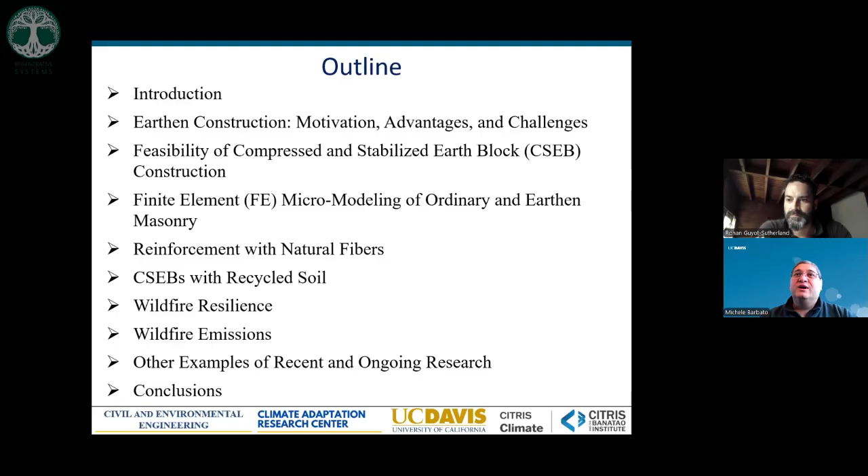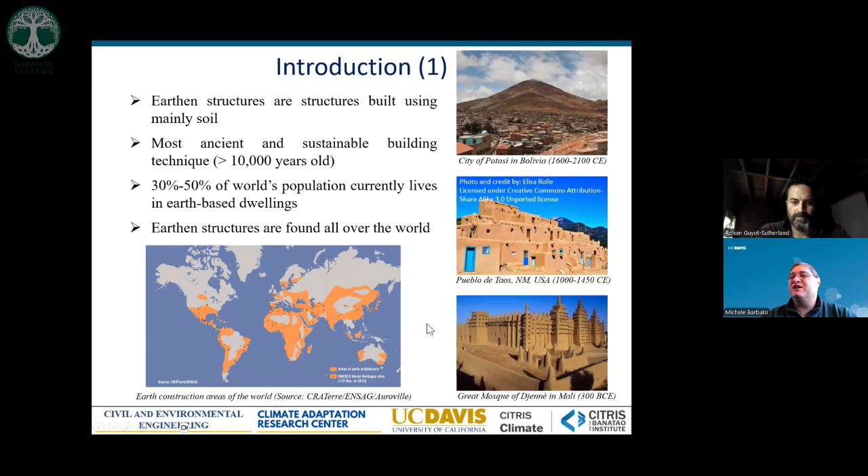Earthen construction exists in very different forms. Historically we have cob, rammed earth, and adobe—different ways of building with basically the same material. Cob is fundamentally building walls with layers of a slurry made mostly of soil; it's very common in medieval England and Great Britain. Rammed earth is a construction technique where soil is rammed from both sides into a wall to provide more mechanical strength—an example is the Great Wall of China. Adobe is probably the most common, at least here in the US, where blocks are made using soil, pressed by hands or feet, mixed with straw or other material for additional resistance, typically dried under the sun, and used like normal bricks.

A more modern twist on this ancient technology is the usage of modern earth blocks in three versions: compressed earth blocks, stabilized blocks, and compressed and stabilized earth blocks. Compressed earth blocks are soil mechanically compressed into the form of a block, which increases the mechanical strength of the brick. Stabilized blocks are when chemical stabilizers are added to the mix to provide additional resilience and durability to weathering effects, particularly water. Compressed and stabilized blocks combine both technologies to create a stronger brick through mechanical compression and a more durable brick through the addition of chemical stabilizers, typically cement or lime.

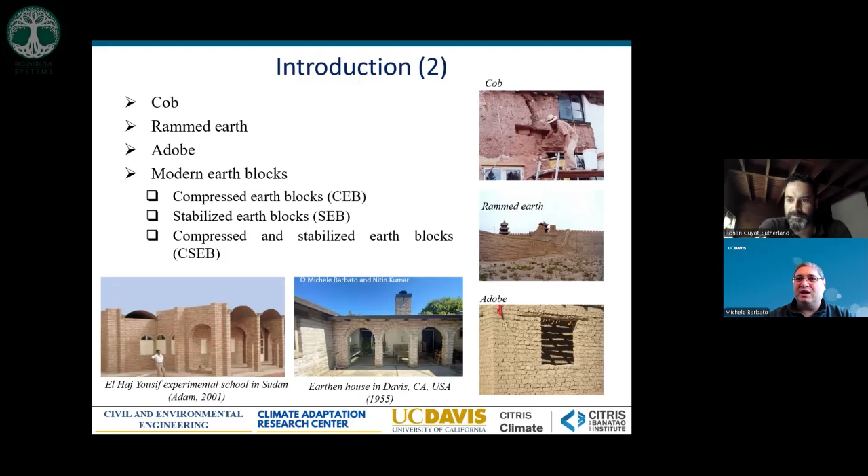Our research is focused on these compressed and stabilized earth blocks, which in our opinion are where modern engineering can be best used to improve not only the material but also how it is used. So why are we looking at this ancient technology and trying to make it modern? There are two different types of needs.

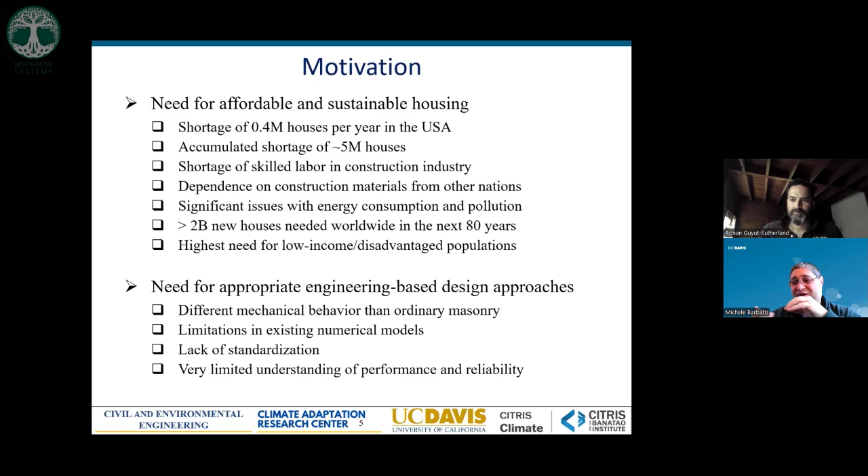On one side is the need for affordable and sustainable housing. In the US alone, we have a shortage of 0.4, now closer to 0.5 million houses per year, and an accumulated shortage—this data is a little old, but it's definitely more than 5 million houses now. Also, we have a problem with skilled labor.

People building in the construction industry—there are not enough people to cover all the jobs that are available. And we have become more dependent on construction material coming from other nations, which has a lot of additional problems we saw during the COVID pandemic: problems with supply chains, timber material went up more than 100% in cost. This was a huge issue. We are now looking at political situations where tariffs could again increase prices of material.

All of that has a chain effect on the industry's capability to provide homes to people who are in need. There are also a lot of issues with energy consumption and pollution. Typically, the homes we are building now are not particularly sustainable. And if we look beyond just the United States, it is expected that in the next 50 to 80 years we will have to build about 2 billion new homes to account for the increase in population and the improvement in standard of living. That's a huge number of houses.

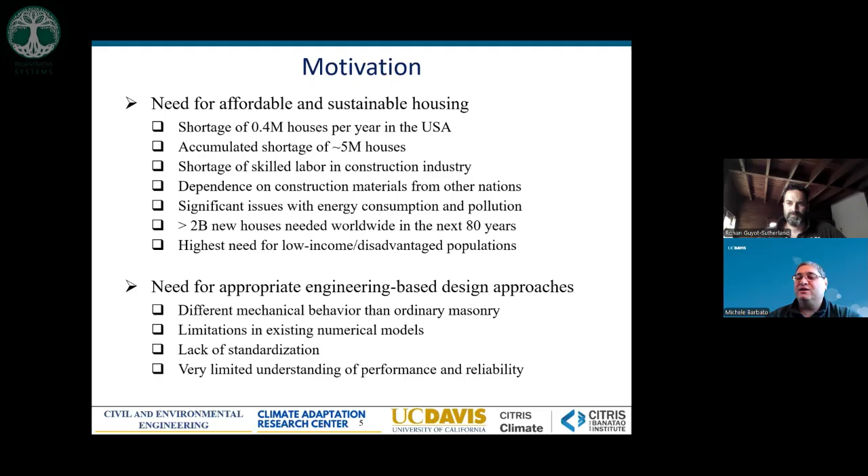Overall, there is a very limited understanding of performance and reliability of these structures done with new materials, which also makes it more difficult to do things like permitting and getting these houses built at scale in a way that can actually make a difference in the home building market. So it's a very interesting problem with a very important and relevant impact on quality of living for people.

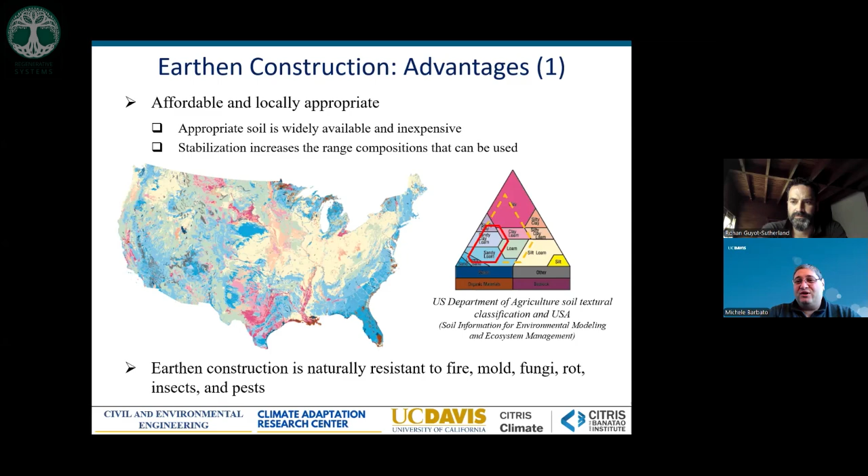Also, it is a healthy and natural material. It has two great advantages. One, it doesn't produce volatile organic compounds, which is very important particularly for chemically sensitive people. And it is a breathable material: when the indoor environment is too dry, it releases humidity kept inside to bring it back into a range of 40 to 60%, the optimal humidity for human health. Vice versa, if the environment is too humid, it sucks out the extra humidity into the wall, keeping humidity naturally within that optimal range without extreme use of AC and other methods. It is also eco-efficient and sustainable.

And it has advantages both in terms of operational energy, heating and cooling, depending on the climate where you're building. By using the thermal mass of these walls, you can obtain savings in terms of heating and cooling between 30 and 70% when compared with an equivalent wooden home.

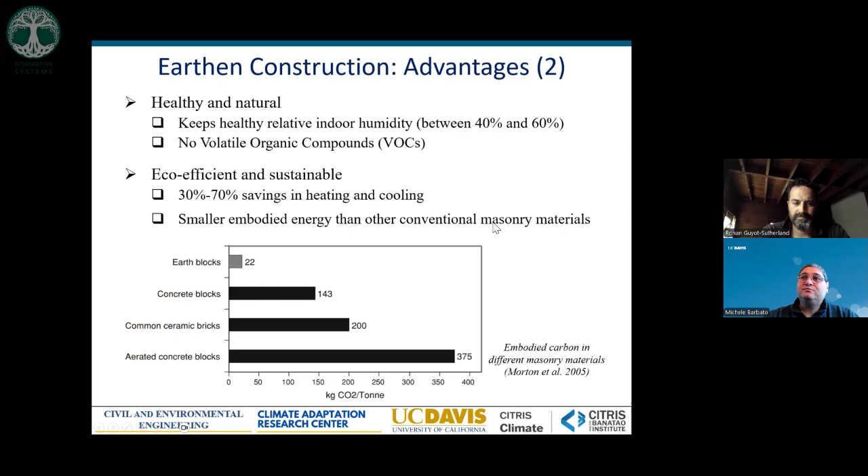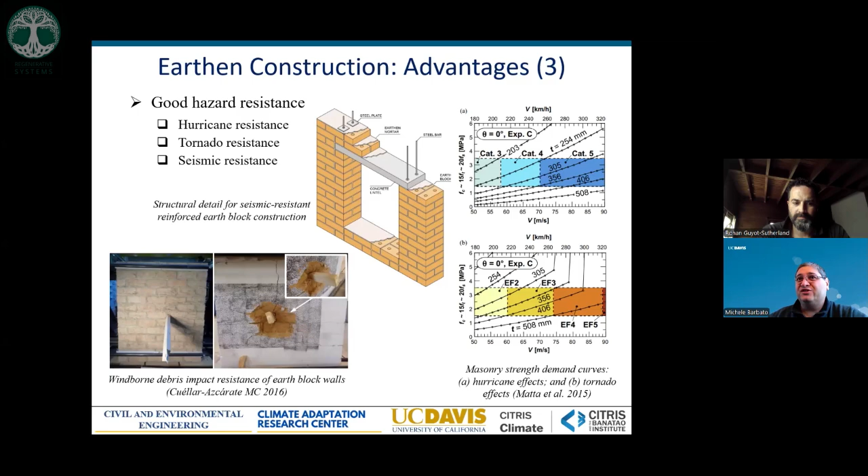Now, another component of that is that it has good hazard resistance. We have investigated the performance of these materials for hurricanes, tornadoes, seismic events, and more recently for wildfires, which I will discuss a little bit later. But with appropriate design techniques, you can have homes that are extremely resistant to all of these different hazards.

There are also challenges, some technical challenges. The first issue is we are using a natural material, not an industrial material, which naturally produces higher variability in the mechanical properties. So if a concrete block typically has a coefficient of variation in strength of only about 5%, you can expect a much larger coefficient of variation in the same property for the earth blocks.

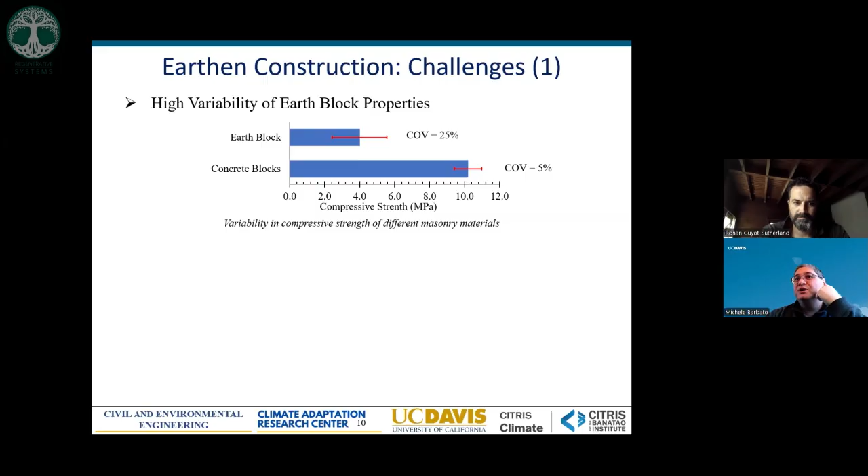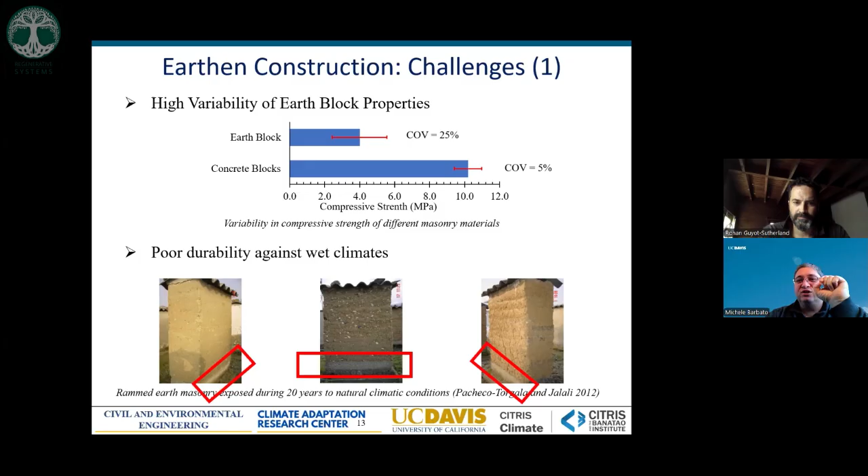Also, by nature, it has some issues with wet climates. You can see here a test representing the equivalent of 20 years of natural climatic conditions, where there is some damage at the bottom of the wall due to the capillarity action of water coming up from the soil and down depending on outside humidity. So this requires particular attention to detailing in order to avoid the negative effects of weathering damage. It is typically a brittle material.

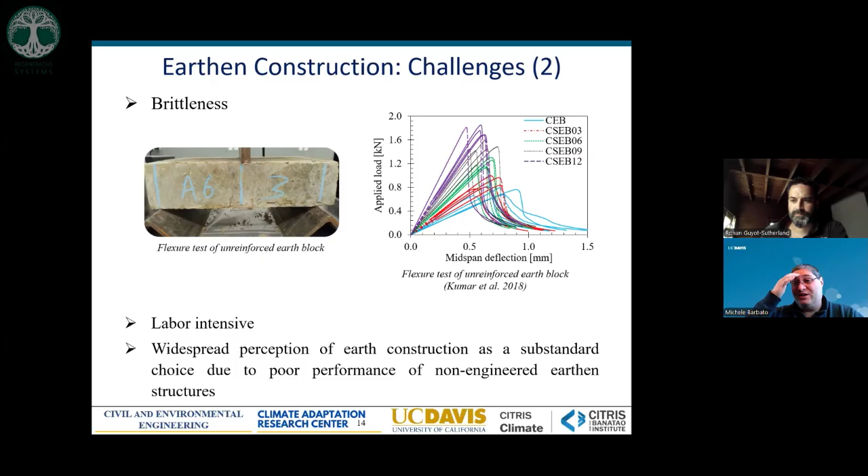This is something shared with any cementitious type of composite. If you look at concrete, stone, and even bricks, they are all brittle. So what does brittle mean? It means that once the material reaches its peak strength, it has an immediate reduction of strength, and so it breaks very rapidly. If you want to visualize it, it's the difference between a piece of chalk and a metal pin. You can bend the metal pin many times before it breaks, but if you try to bend the chalk, you may have to exert a higher force, but then it breaks immediately and you cannot bring it back together. So that's what brittle means.

It's also labor intensive. This is shared with all masonry technologies. And these are all technical problems that, with ingenuity and modern engineering knowledge, can actually be addressed.

The big problem is more a cultural type of problem: the widespread perception of earth construction as a substandard choice. This is really related to the fact that historically, non-engineered earthen structures have performed poorly, particularly under seismic actions.

However, the problem there is not really the material itself, because historically, when other modern materials like reinforced concrete or steel have been used without proper engineering of the details and construction, they also have performed very poorly.

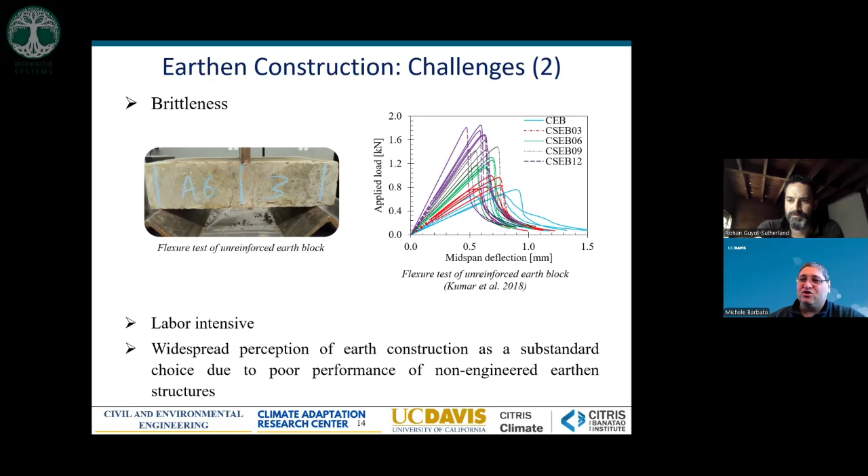So if you use a material incorrectly, no matter what that material is, it will perform poorly. I am pretty sure that earthen construction, when used correctly, will perform as safely as other modern materials.

So when we are talking about compressed and stabilized earth blocks, how do they look and how do we make them? Here I'm showing you a video of our first CinvaRam machine that we built in our lab with some of my students, who are very energetically producing some of our blocks.

As you can see, it's a bit of a laborious process with this hand-held machine. That's how the bricks come out, and you can actually use molds to give all of the different shapes that are shown below. So we can make very varied shapes of bricks.

Now we are not using that machine any longer. We were able to produce 30 to 40 blocks per hour with that machine, and the students weren't particularly happy because of the exertion that was connected with it.

We actually bought an Auram press, I think it's an Auram 4000. It's a hydraulic machine that produces about 400 blocks per hour, much less work. All you need to do is load the soil on the machine, it's carried inside, and the machine spits out the blocks, then you move the blocks. Students are much happier to work with that because there's much less work and many more blocks in a much shorter time.

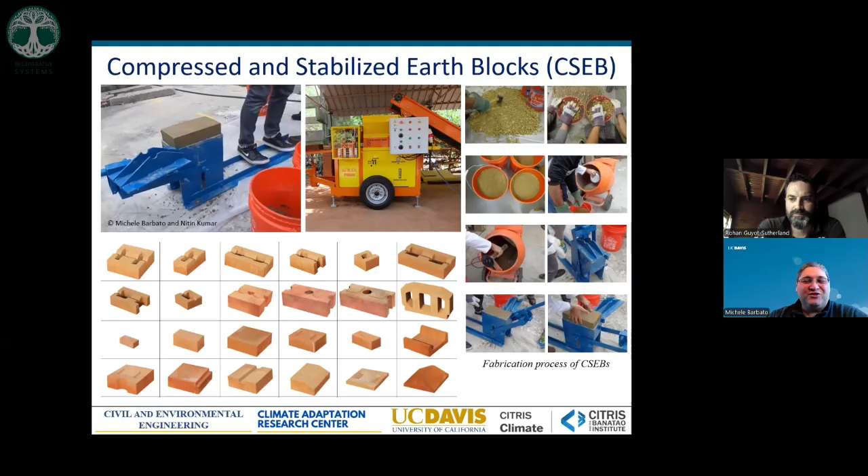So there are actually machines that are even bigger than that. When you want to build an entire house, you can have machines that produce up to 1,000 blocks per hour. We didn't need it for our lab, but that's probably the direction to go.

Our first investigation was to understand if using this material is feasible. For feasible, we really need to look at all of the different aspects of what feasible means. In particular, we identified three major components. On one side, we want feasibility for structural resilience - do we make homes and buildings that are strong enough with this material?

A second is architectural feasibility - do we make homes that are pleasant enough that people want to live in these homes? Because otherwise, it doesn't matter. You can make the best home, but if no one wants it, no one wants it. And then the third one is economic feasibility.

So we were doing an investigation in the US Gulf Coast region. After Katrina, there were more than 400,000 people displaced in need of a permanent home, typically living in mobile homes, which are extremely dangerous for flood and wind, so not something you want to keep people in for a long time. So there was a need for affordable hurricane resistance housing, and we were close to the Mississippi River.

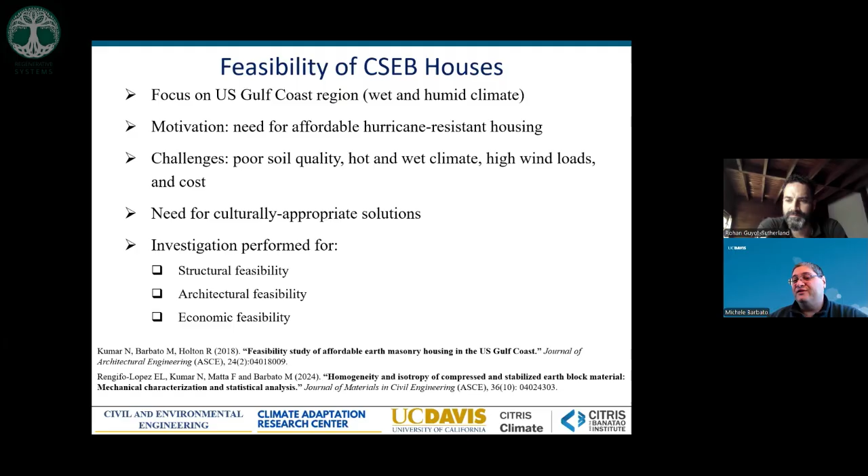And we need to make it affordable, because the people that do not have homes are the ones that couldn't afford a home. So we needed something that is not more expensive than a typical wooden house.

We started by investigating and characterizing the soil around the river. We found that as long as you move at least a couple of miles away from the river, you're never in the optimal region where you can just use the material and make a block, but with some additional chemical stabilizers, some amount of cement, we are in that suboptimal region that can still be used.

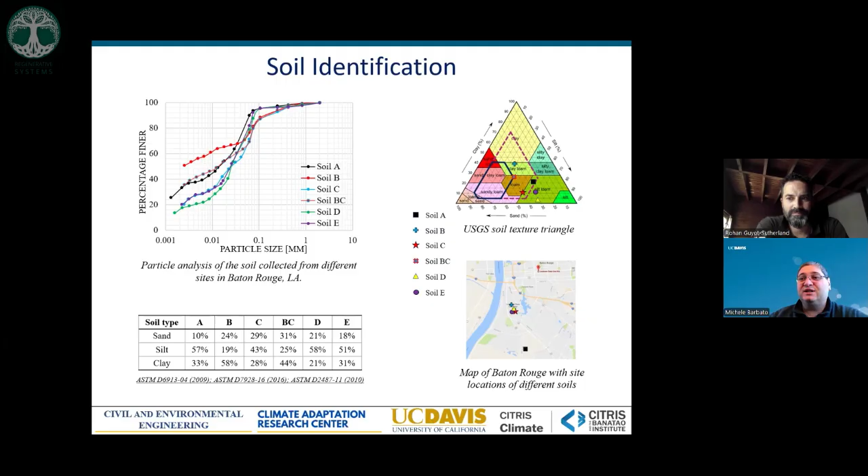And then we started investigating the mechanical properties, and we are interested in several different elements. Obviously, compressive strength, modulus of rupture, which is a measure of the tensile strength and the brittleness of the material. And then we are also interested in two different compressive strength conditions. Due to the nature of this material, where the clay is able to absorb and release humidity, the mechanical properties are highly dependent on the amount of water trapped inside the material. So we wanted both the dry mechanical strength and the wet mechanical strength, because they are both connected with different levels of performance.

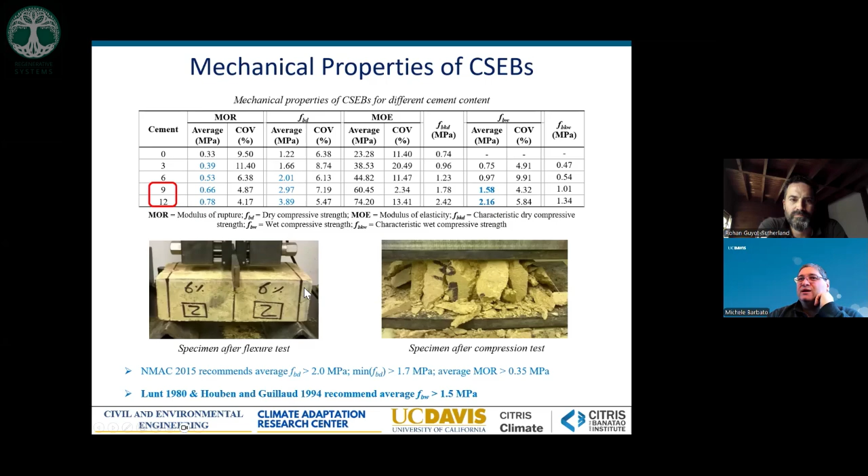When we started looking at the wet compressive strength, which needs to be above 1.5 megapascal to ensure proper durability of the material, we had to increase our amount of cement to 9 and 12%. These two levels are the ones we used for our further investigation of the mechanical properties of the entire structure, not only of the components.

The other issue we had with the wet and humid climate is to ensure durability. So we built a small wall outside of LSU and left it there during the summer for about 6 months to see what was happening. Six months may seem short, but during that period we had two tropical storms, so quite a lot of rain and quite a lot of loads.

The additional thing we did was cover half of the wall with a soil cement mix with similar composition to the material used for the blocks. Then we looked at what was happening on the two different sides of the wall.

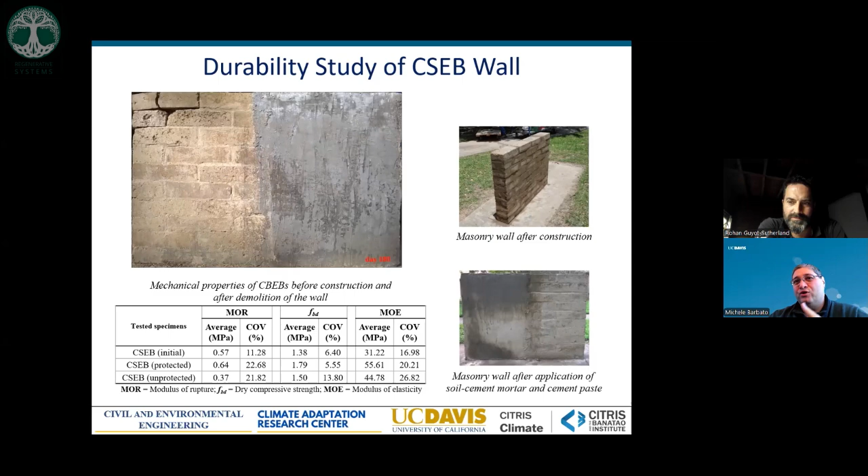However, we looked at what happened to this wall. After 6 months we demolished it brick by brick and tested the components again. We found that while the unprotected side had a degradation of strength, the protected side, which even visually looked perfect, not only had no visual damage but actually the properties kept increasing. The strength, both modulus of rupture and dry compressive strength, were significantly higher than the original material. That's because the humidity provided by the water kept the cement reacting with the soil, which is why the material became stronger when we retested it.

So a very simple solution to the technical problem of durability is simply having this sacrificial layer, which can be done as we did with soil and cement, or more traditionally with lime plaster, which then just needs to be repainted on top every 10 years or so — a much lower level of maintenance than having to check every year for termites in wooden walls.

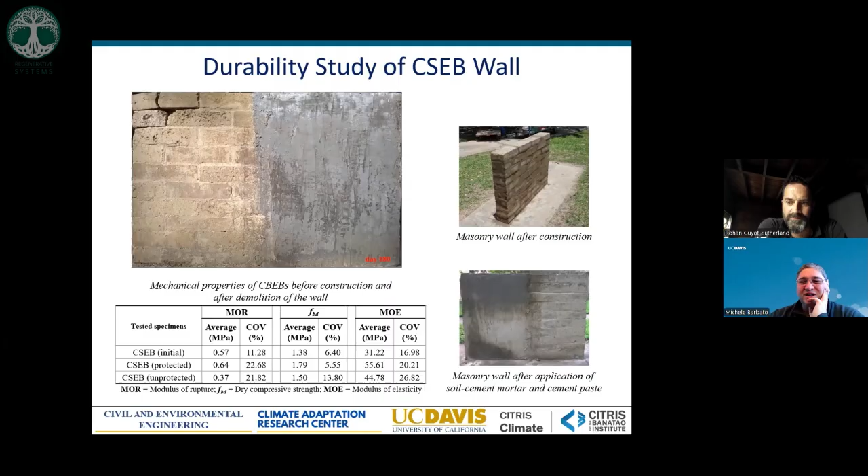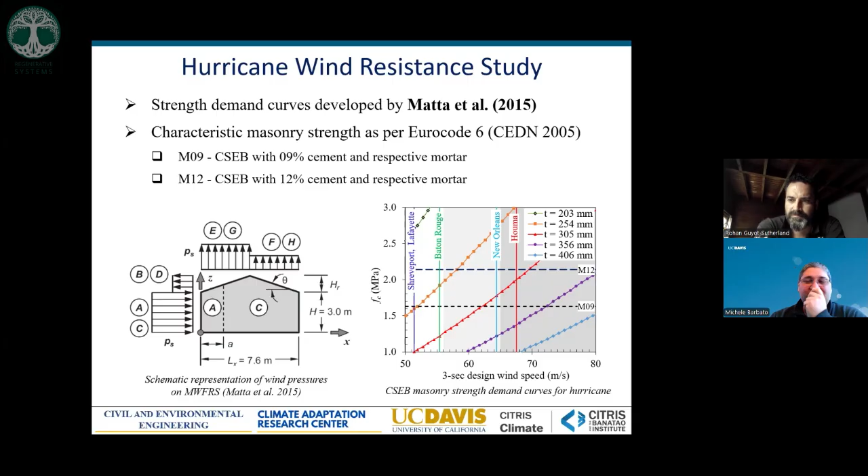Now, the shotgun is the typical house used in towns, in urban environments, where the house is elongated so that wind can enter from one side and produce fundamentally natural air conditioning just by having airflow through the entire house.

The other type of house we investigated is called the dog trot, and that is a more rural home where you have an internal court, and the air is fundamentally flowing from the internal court into all of the rooms around it. I'm not presenting it here just because of time limitation.

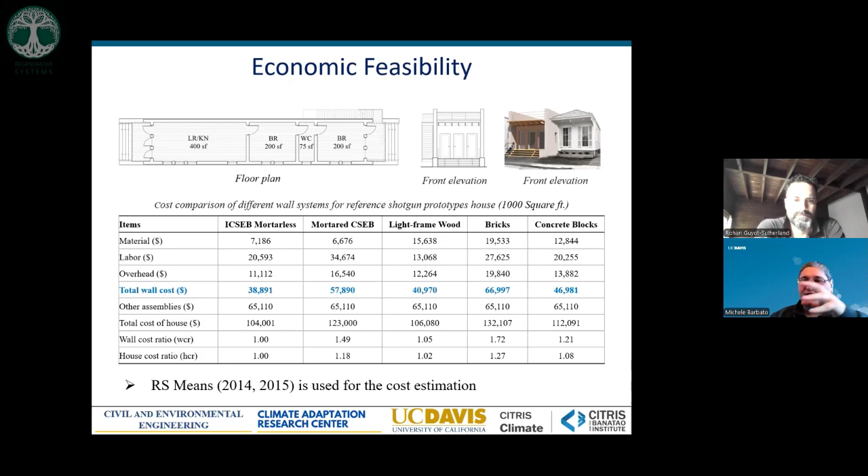I didn't want to present too much stuff, but we did the calculations for both types of homes, and we compared the costs that are coming. These are costs for 2015, so they're not updated anymore. We compared ordinary light frame wooden constructions, ordinary brick construction, concrete block construction, ordinary mortared compressed and stabilized earth blocks, and also a new technology we developed called interlocking compressed and stabilized earth blocks, which is also mortarless. So fundamentally we are using shear keys in the blocks to keep everything together without having to add an additional layer of mortar between the blocks.

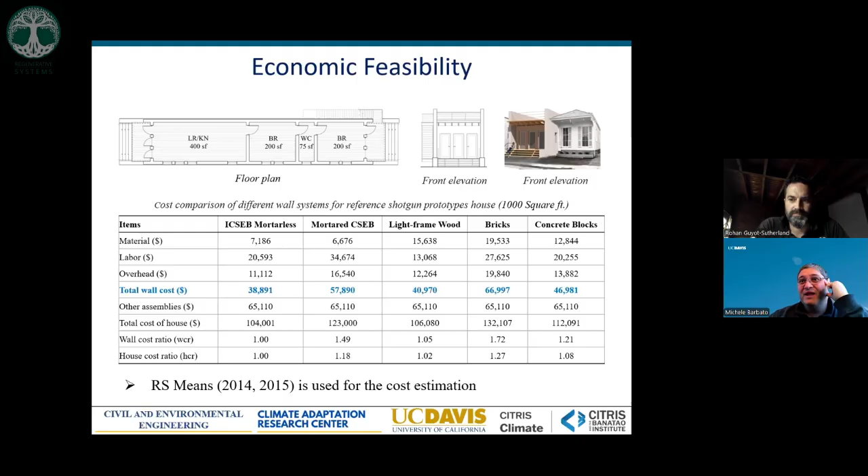So our calculations actually gave us a 5% decrease in cost for the construction of the walls, which was about a 2% decrease in cost overall for the construction of the entire house. Again, these are data specified for Southern Louisiana and for 2015, so a little out of date, but our goal was to develop a technique that would have similar costs as light frame wood, with all the advantages connected with earthen construction.

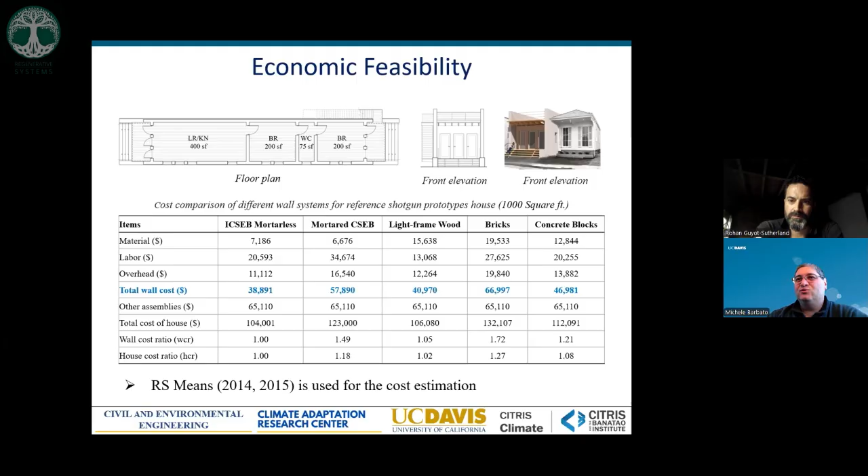Now I'm going to switch to another technical problem we have been addressing. We were very happy with the results of our feasibility study, but now we wanted to go from 'okay, it is feasible' to 'how do we make it actually happen?' There are several different problems that need to be addressed. One of them is that in order to design structures beyond just homes, you need to be able to calculate their strength using engineering knowledge.

And one of the tools used is finite element modeling. But the finite element modeling used for ordinary masonry, which is what exists in the literature, doesn't work very well for earthen construction. I'm going to go through the reasons and explain how we addressed that.

The best methodology for modeling the response and performance of walls made with masonry elements is the so-called finite element micromodeling approach, where we decompose the different elements of the wall into units and mortar, and then use different ways of modeling it.

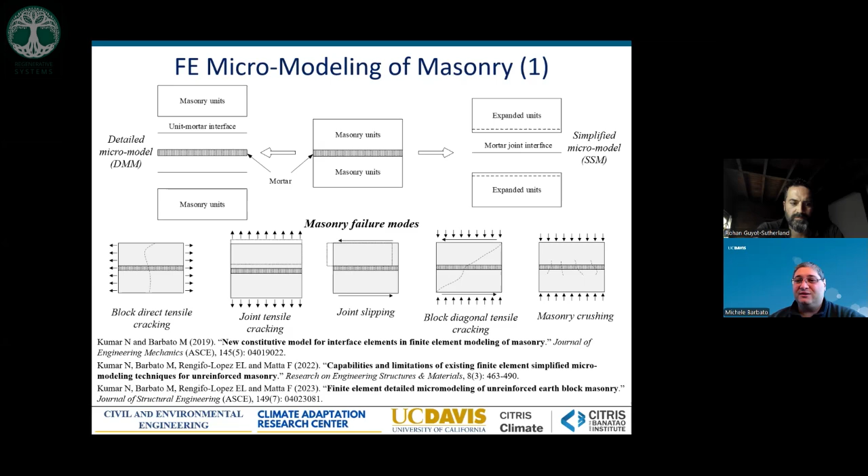This model fundamentally assumes that everything that breaks happens in the interface, which is a reasonable assumption for ordinary masonry, where the blocks are typically very strong and the mortar is weaker. But for earthen construction, the mortar is very similar—it's done with the same material as the blocks. So this assumption that allows the use of a simplified micromodel simply is not satisfied.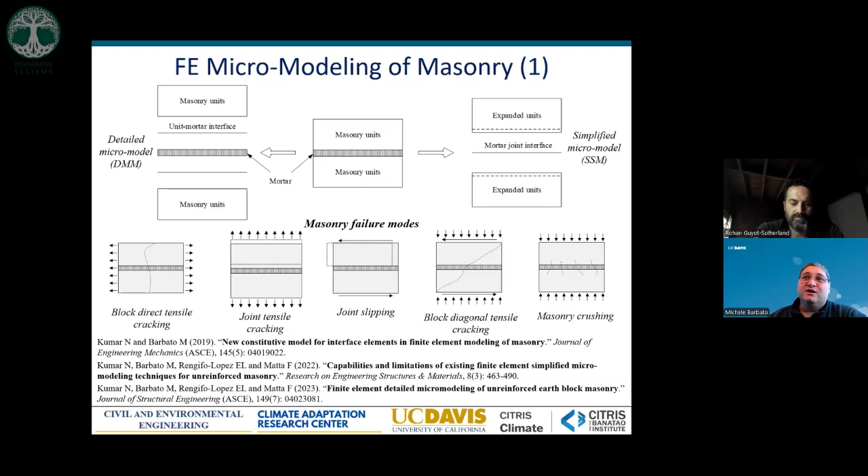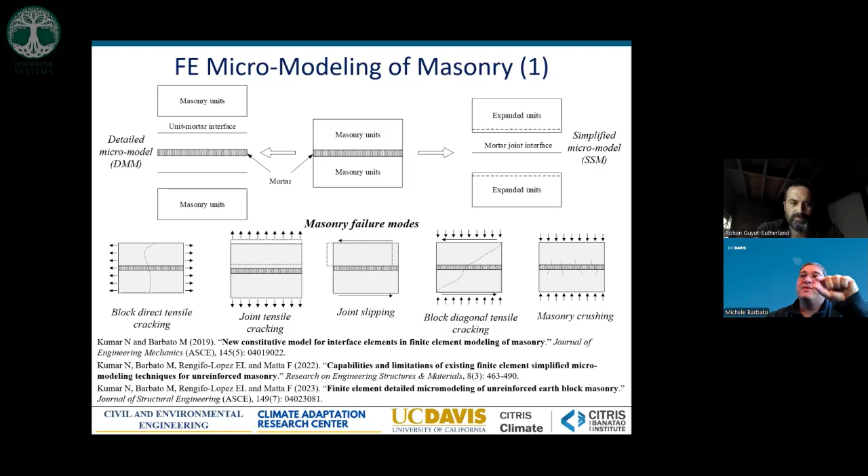So we came up with a detailed micromodel where we explicitly model the layer of mortar as well. For the interface and the mortar, we needed to develop a constitutive model that still accounts for the different mechanisms.

I won't go too much into the details, but fundamentally the blue line models the cracking due to tension and the cracking due to shear slipping, while the red line is where compression and cracking due to a combination of shear and compression control the mechanism of rupture of our wall.

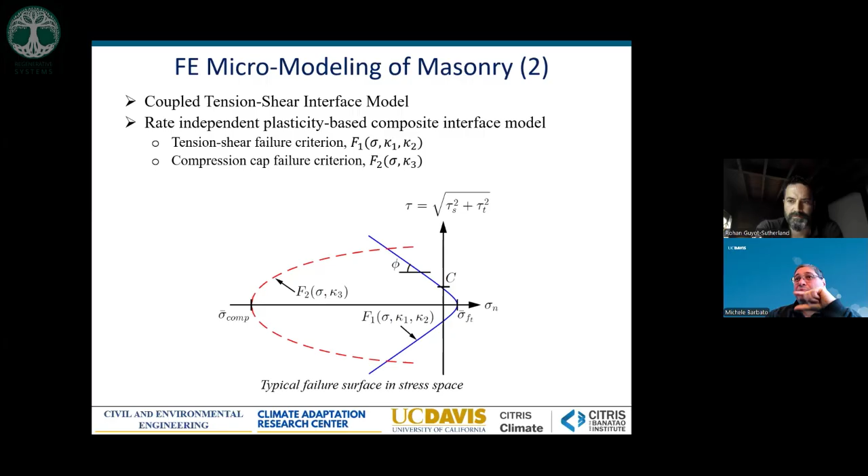With this new model and new modeling approach, we went ahead and tested how it would perform first with ordinary masonry, using experiments available in the literature, and we modeled it with our different techniques.

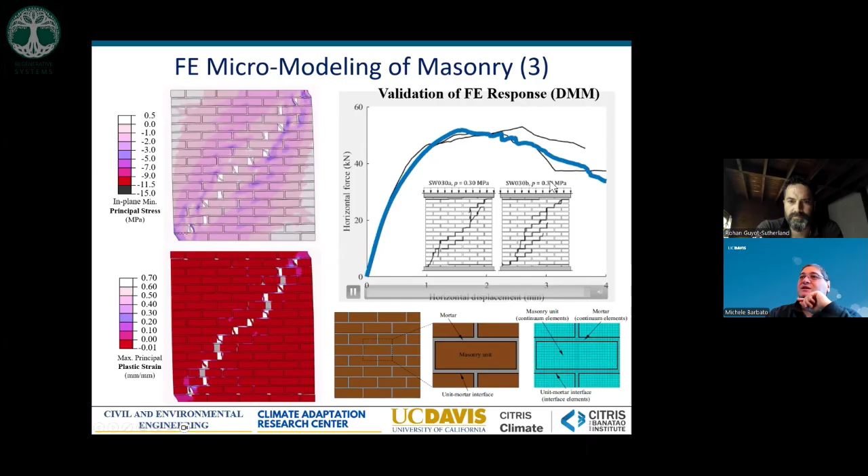You can see the blue line is the result of our numerical simulation and how it compares with the black lines, which are the experimental results.

In addition to a very nice correspondence between horizontal force and horizontal displacement globally for our walls, we also had a very nice match of the cracking pattern with what was observed experimentally. The open spaces in this red figure show where the cracks form and where blocks separate, and you can compare that with the dark lines in the experimental results. We are capturing not only the global behavior but also the local behavior and crack formation.

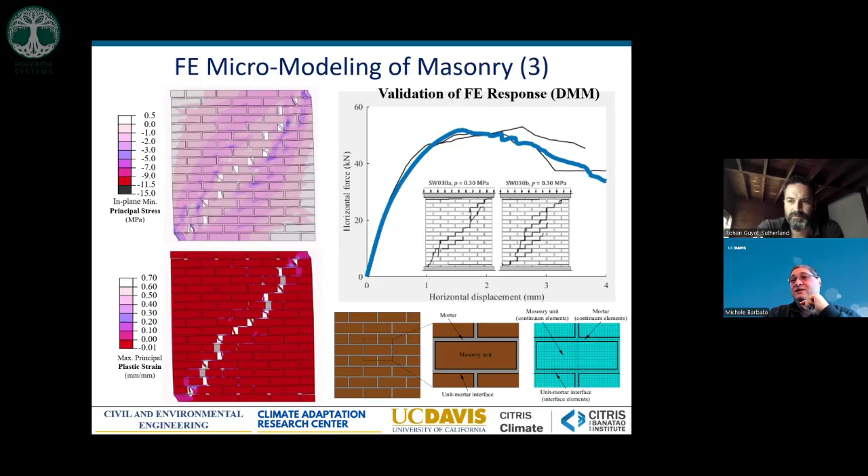So we found that these results were pretty good with all the different models, including both the simplified and the detailed micromodel that we developed.

You can see again a comparison of numerical results with experimental results when changing the level of compression applied on these walls. We are still doing pretty well with both simplified models and detailed models.

This told us that doing a detailed micromodel, which is computationally more expensive, doesn't really make sense for ordinary masonry, because the simplified models are already pretty good.

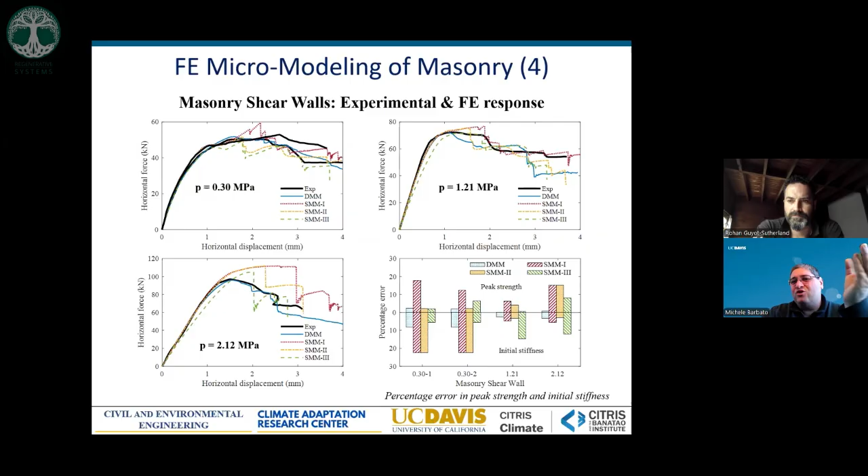But then we did the same exercise with compressed stabilized earth block wallettes. You can see on the right side the results of the experimental testing. The black lines correspond to the experimental results, and the other colored lines come from the simplified micromodel, which are not good—we are overestimating the load this wall can take by up to 200% when loaded diagonally.

So here is where our new model actually starts doing really well. This yellowish line is our new model, which is pretty good at capturing not only the peak strength of the wallette, but also this lighter color here, where the formation of cracks is happening.

Our model is actually able to capture the cracking going through the bricks, which is fundamentally physically impossible to capture with the simplified micromodels. That is the reason the simplified micromodels are not able to capture the real strength of these walls.

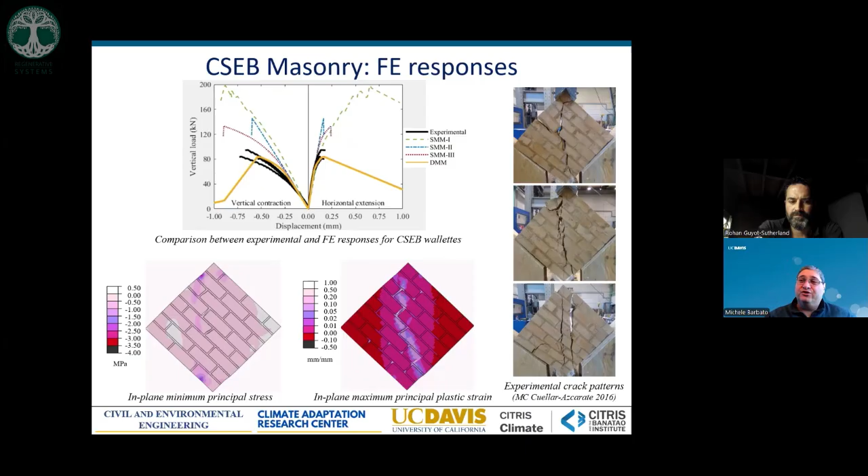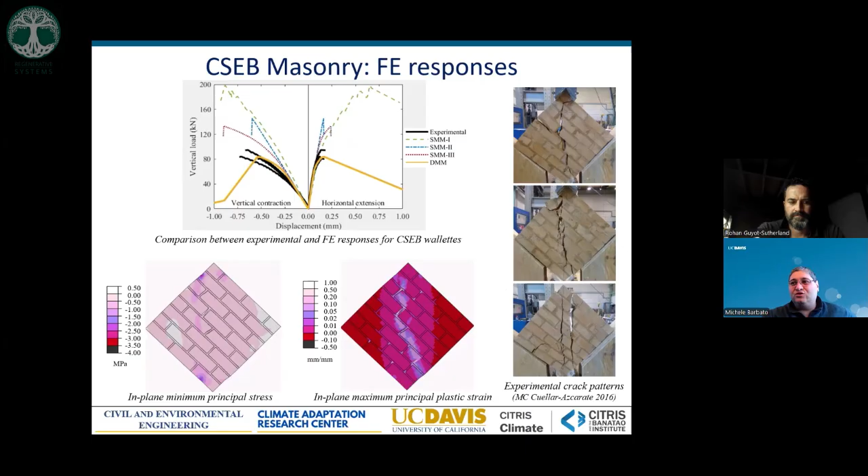So fundamentally, what we have accomplished is that now we can use modern finite element technology to predict the performance of walls made with our material, which is a fundamental ingredient to be able to use it in an engineering sense.

Another study we did was to address one of the other problems I was describing at the beginning, which is the brittleness of these materials. We started this investigation in southern Louisiana, where there is big production of sugar from sugar cane, and big production of sugar also produces a lot of extra material that needs to be disposed of.

These come in the form of sugarcane bagasse fibers and sugarcane bagasse ash. For this study, we investigated using the fibers directly in the block to improve the brittle behavior. We know from other types of fibers that they improve the post-peak behavior, giving the ductile behavior I discussed earlier. Think of a pin made of metal that you can deflect and deform completely, yet the material still doesn't break. That's what we want to obtain here.

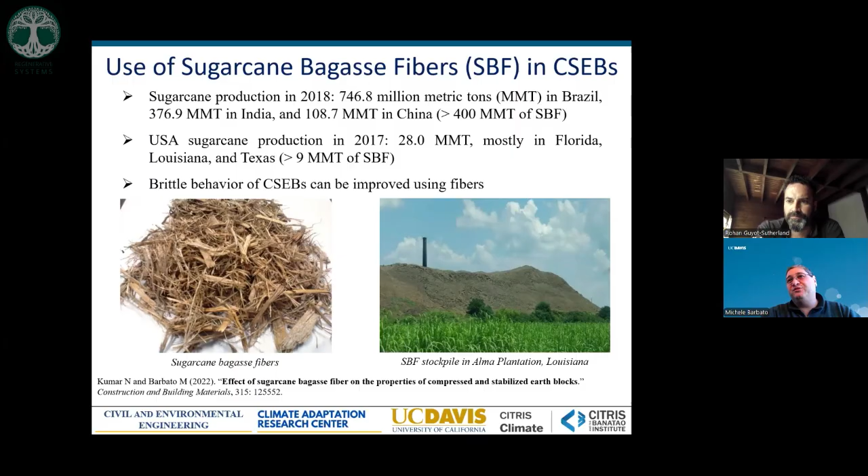There are 28 million tons produced in Florida, Louisiana, and Texas of sugar cane, which lead to more than 9 million tons of sugarcane bagasse fibers that need to be disposed of every year. We are trying to find a use for that.

So what we did was consider blocks with three different amounts of cement, 0, 6, and 12%, expressed as weight of total solids, and with three different levels of sugarcane bagasse fibers, 0%, 0.5%, and 1%, expressed in volume of the material. We performed flexure and compression tests to identify how we modify the ductility, the post-peak performance of these materials.

What we found, not surprisingly, is that increasing the amount of fibers produces a less rapid deterioration of strength after the post-peak, with only minimal changes in the actual peak strength. For a fixed amount of cement and a change in fibers, there is a delay in the peak point, and the peak value typically doesn't change a lot. With an increase in cement, we found a general increase in strength and the same type of behavior in terms of fibers.

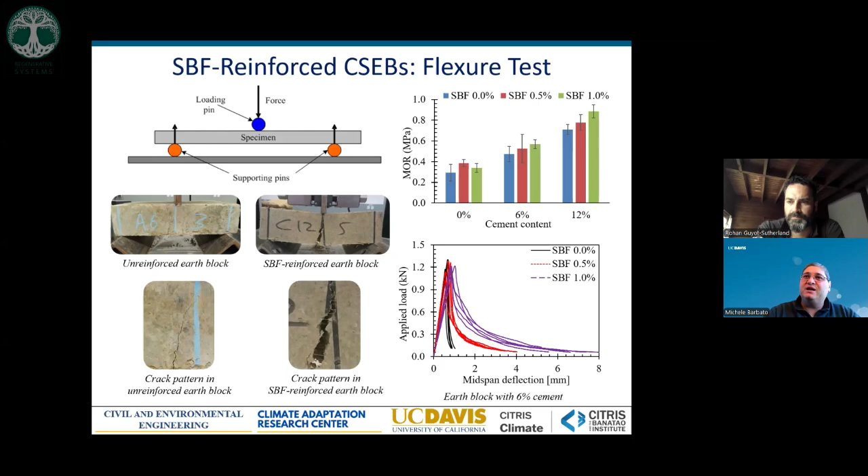So fundamentally, we are improving the performance of the material post-peak in terms of brittleness, and this is particularly evident when testing in compression. You can see here the lines corresponding to no fibers are black, the ones corresponding to 0.5% fibers are red, and the purple lines are the ones with 1% fiber.

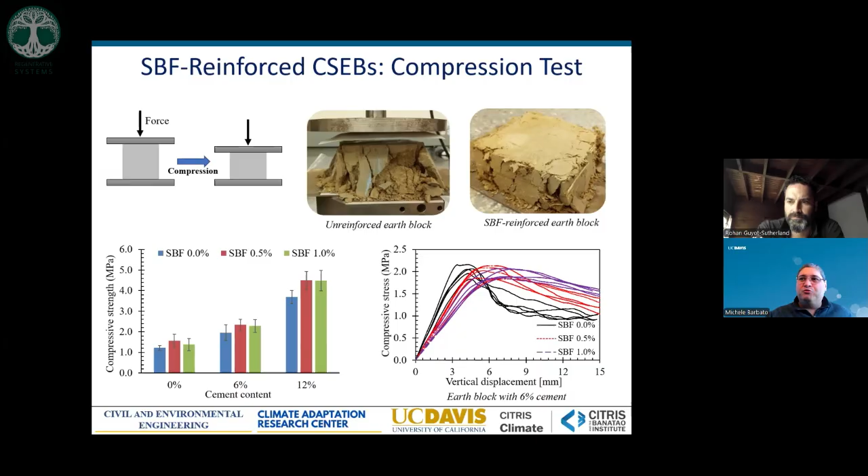This is again done for a fixed amount of cement. When you increase the cement, you increase the peak. When you increase the fibers, the peak typically remains the same, just moved further out for larger displacements, allowing maintenance of peak strength for a much wider range of displacements, which is exactly the ductile behavior we wanted to achieve. So the usage of natural fibers is a positive addition for improving overall ductility, useful for both wind loads and seismic loads.

A thing we were worried about was the effect of fibers on the durability of the material. The reason being, having a lot of fibers inside the material can suck even more water inside, and we were worried about the production of micro cracking inside the materials.

We observed a little bit of increase in loss of mass with the increase in fibers. However, the best way to address that is an increase in amount of cement, and we found that with zero cement, it doesn't matter how much fiber you're using, the material disintegrates after 12 cycles of wetting, drying, and scratching the surface.

To describe the test: fundamentally, we wet the material by submerging it in water for 5 hours, then use a metal brush to see how much material gets removed after each cycle, then dry the material. Once it's dry, we go through that process 12 times, and then measure the total loss of mass from the different materials.

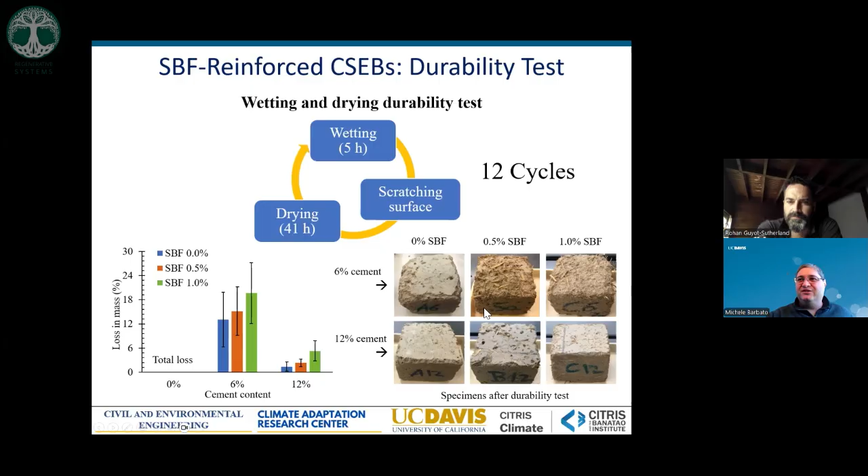Then we investigated the fire resilience of our material. I'm switching again to show all of the different things that are needed to really evaluate the quality of the material and the feasibility in usage.

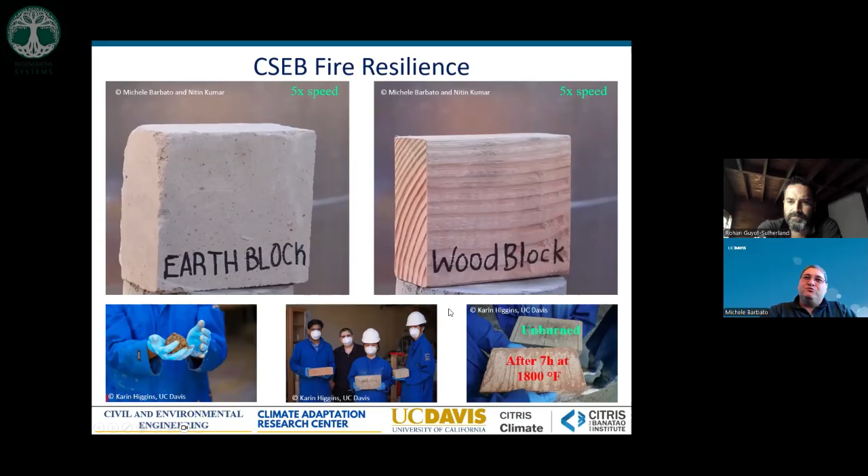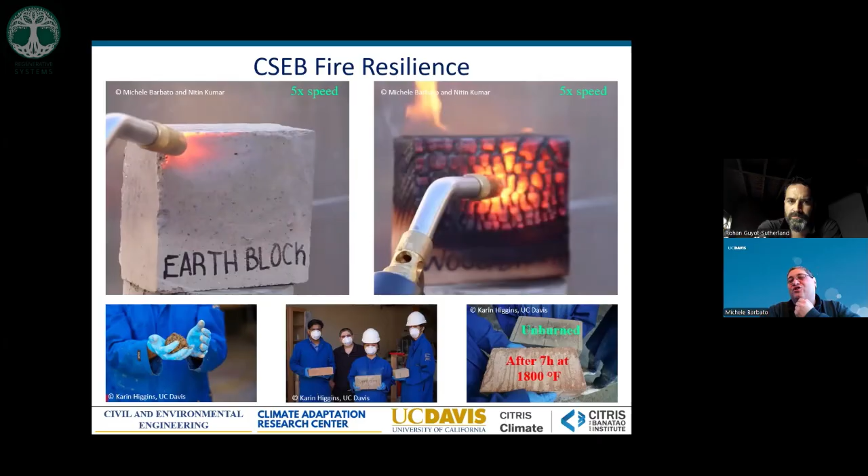This was something quite obvious to me, that soil is the only thing that remains after fires. It doesn't burn. Here you can see the comparison of our earth block and a wood block of a 2x4 typically used for construction of homes. In our earth block, all you can see is a little bit of change of color, and obviously the wood is completely charred.

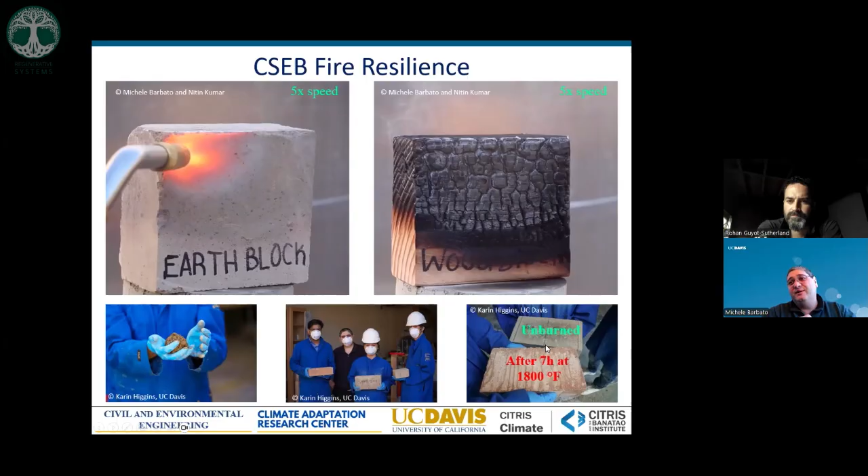On the bottom right side, you can see the comparison of our block as it is, and then a block that was subjected to 7 hours of flames at 1000 Celsius, about 1800 Fahrenheit, 1832 to be more precise. Fundamentally, all you see is a changing color of the block, but there is no real degradation of the material, and that is after 7 hours in a furnace at a very high temperature.

So we wanted to have a little bit more information on what is happening, and we did a complete study on the performance of the material. We used soil collected from Paradise, California, after the Camp Fire. You may be aware that the town of Paradise was fundamentally completely destroyed during the 2018 Camp Fire. So we wanted to investigate that particular soil to provide an option for a more resilient type of construction in a very high fire hazard zone that was just destroyed by fire.

Here are the details on the material. We used a 9% Portland cement amount in weight of dry natural soil. And we did the investigation of all of the physical properties of the soil in terms of particle analysis, Atterberg limits, that are fundamentally the amount of water where the soil starts changing physical composition.

We did the soil compaction test to find the optimum moisture content that would be needed to produce the maximum compaction of the material that is optimal for our blocks.

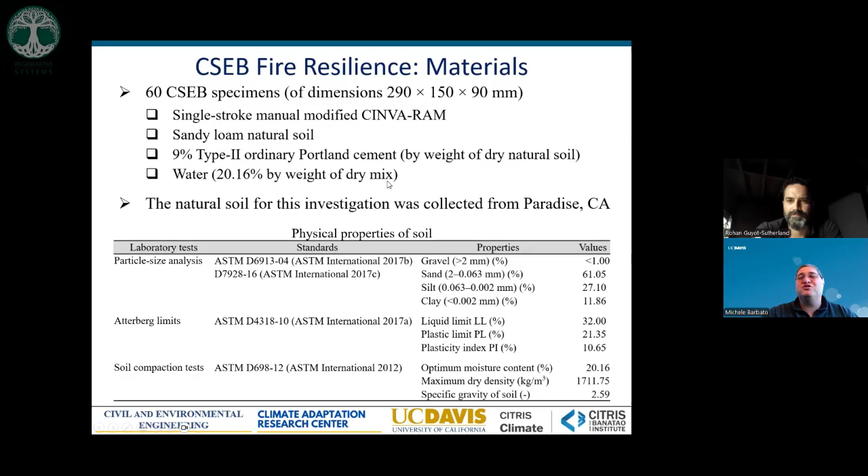We were still using our manual CINVA-RAM, the blue machine that I showed you at the beginning, which requires a lot of work. So we did only 60 specimens for this investigation. These specimens were divided into 6 groups of 10 specimens.

Some were left at room temperature, and others were tested under 200 Celsius, 400 Celsius, 600 Celsius, 800 Celsius, and 1000 Celsius as I indicated before, the 1800 Fahrenheit, which is a very high value of temperature for a wildfire.

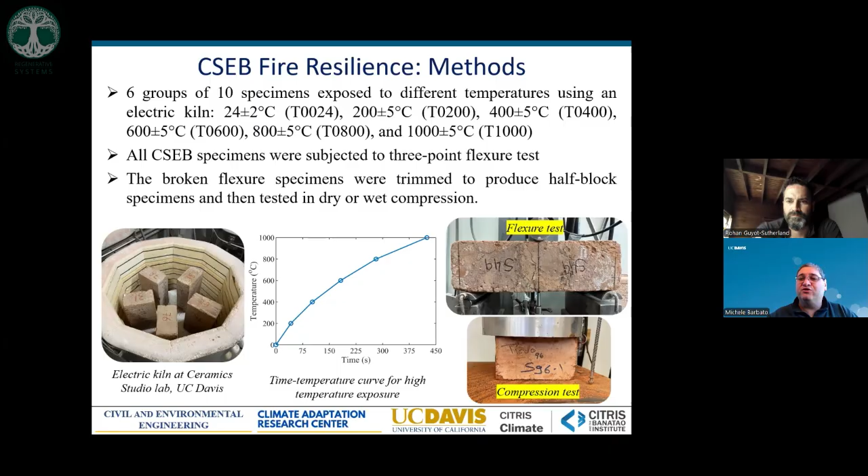After heating the materials for several hours, we tested them under a 3-point flexure test to find the modulus of rupture. Then the 2 parts of each of the specimens were trimmed to produce the specimen for compression test, that were tested both with dry compression and wet compression.

And this was the first indication of what we were kind of expecting: these blocks are transforming at different temperatures from earth blocks to normal fired clay bricks.

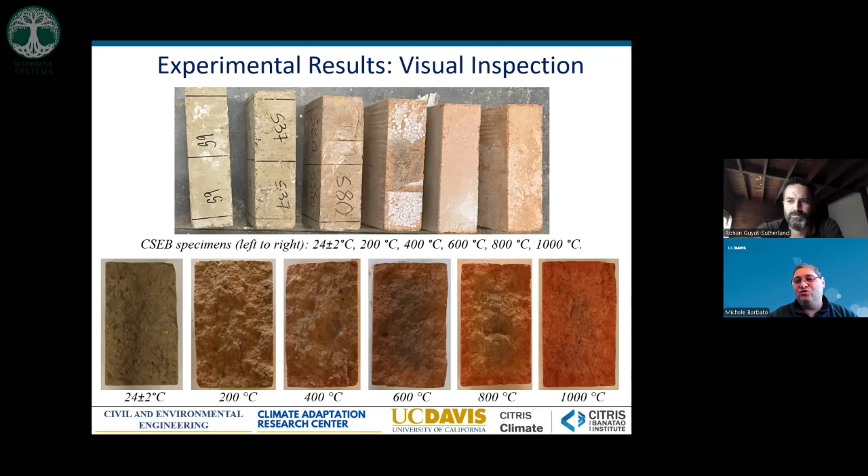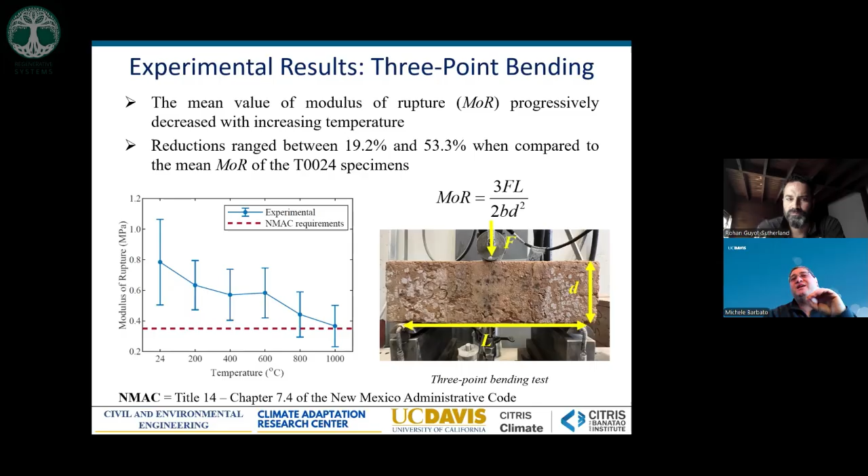Our conclusion was that we used too much cement. We could have had better performance by using a little less cement than what we used, which I guess is good for optimizing these blocks in the future. But from the modulus of rupture, we have this slight decrease in performance, which is still above the minimum requirement for the New Mexico administrative code.

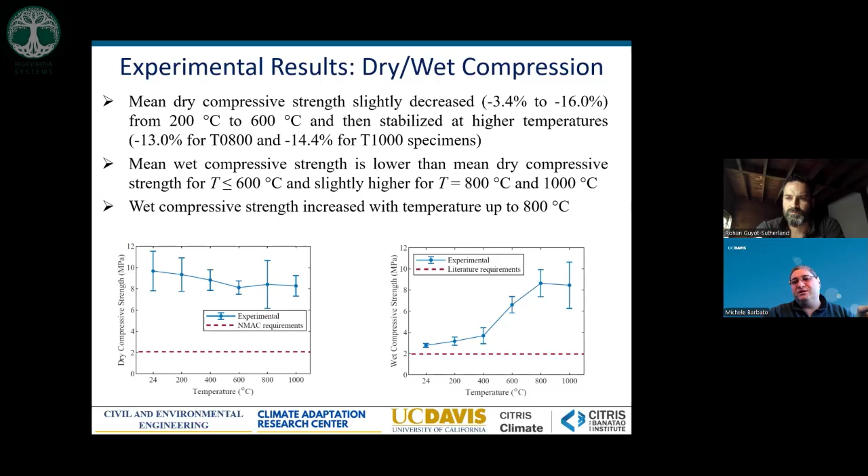Another investigation that we did was to understand the wildfire emissions that come when things go wrong and the house burns. Our goal is to actually have houses that do not burn at all, but we wanted to understand what happens even in the worst case scenario.

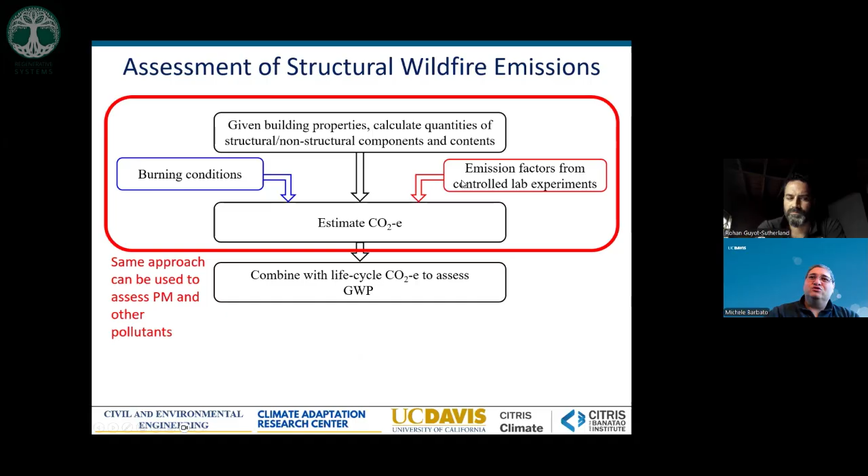So we came up with a framework to assess the emissions estimated in terms of CO2 equivalent, and then eventually combine it with a life cycle assessment to understand the global warming potential associated with our construction versus a normal wooden construction. We focused only on the emissions in the first part of our research, because that was already a big contribution to knowledge.

We took as an example a pre-designed structure that was used for the reconstruction in Paradise using light frame wooden construction. But then we also designed it in different versions: respecting Chapter 7A requirements, not respecting Chapter 7A requirements, and then building it with earth block materials.

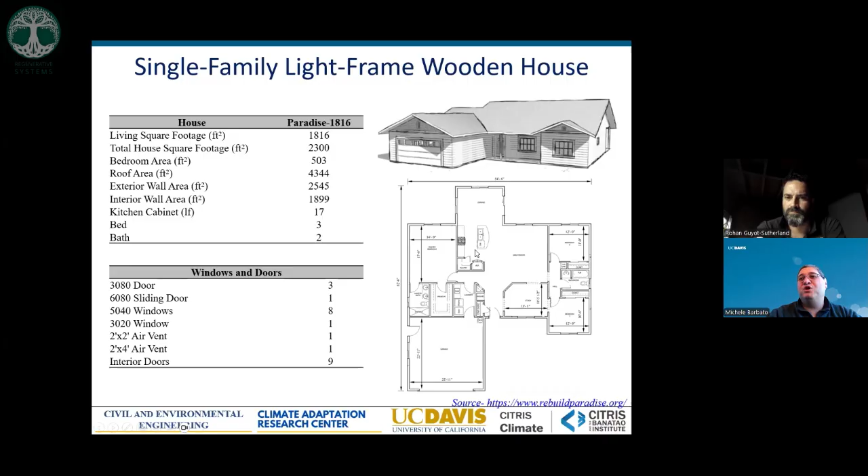We did an investigation of all the materials included, and for each we tested to evaluate the emissions per unit mass of material. We found that with the interlocking construction, we can be cheaper than a wooden construction that is compliant with Chapter 7A.

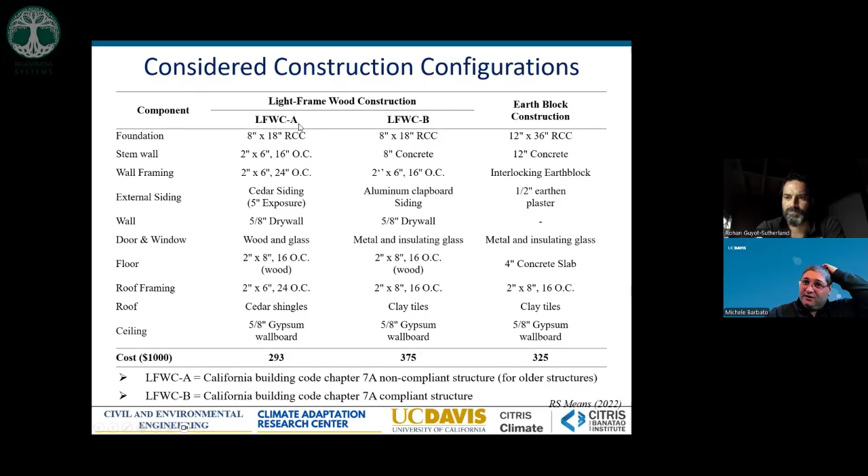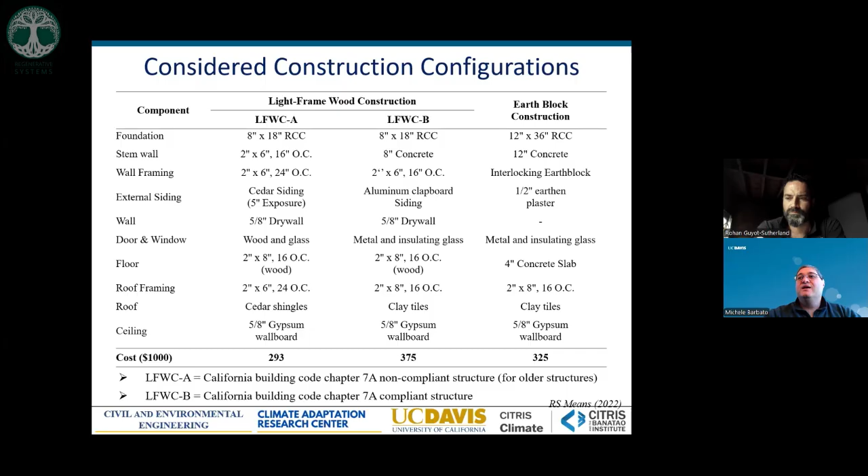LFWCA corresponds to light framed wooden construction that is non-compliant, so older structures before 2008. LFWCB is the same wooden construction but compliant with Chapter 7A, which is the chapter that indicates requirements for construction of homes and buildings in the wildland urban interface to provide additional resistance to wildfire. So our earth block construction is more resilient to wildfires and cheaper than a compliant structure.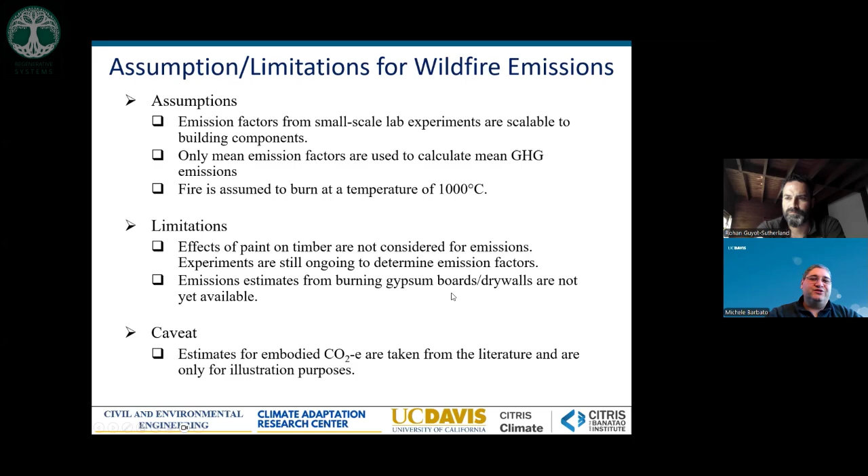We made some additional assumptions, particularly in the life cycle assessment part. We took results that were already available in the literature; we didn't do our own calculations. Also, we could not add the effect of paints, gypsum boards, and drywalls because at that time that data was not available, so we removed that from our calculations of emissions.

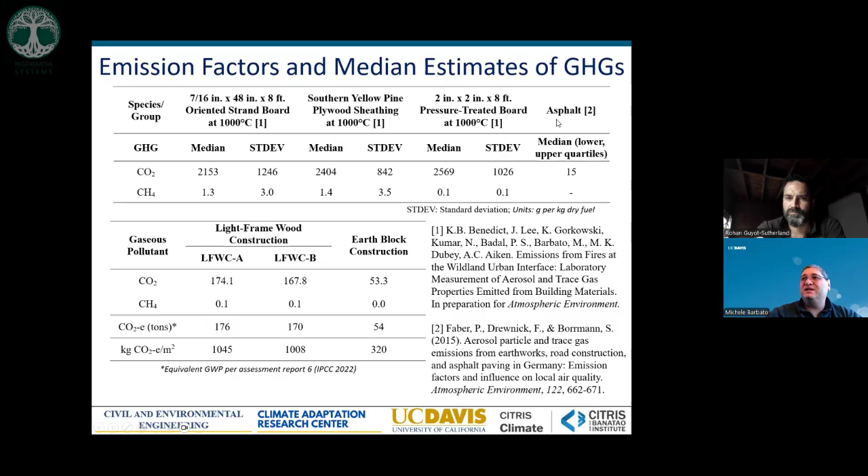We did our evaluations, calculating how much CO2, methane, formaldehyde, and other materials are produced when burning all the different types of materials used in construction. We ended up with an estimate per unit area of emissions in terms of kilograms of CO2 equivalent for the light frame wooden construction, non-compliant and compliant, and then for the earth block construction.

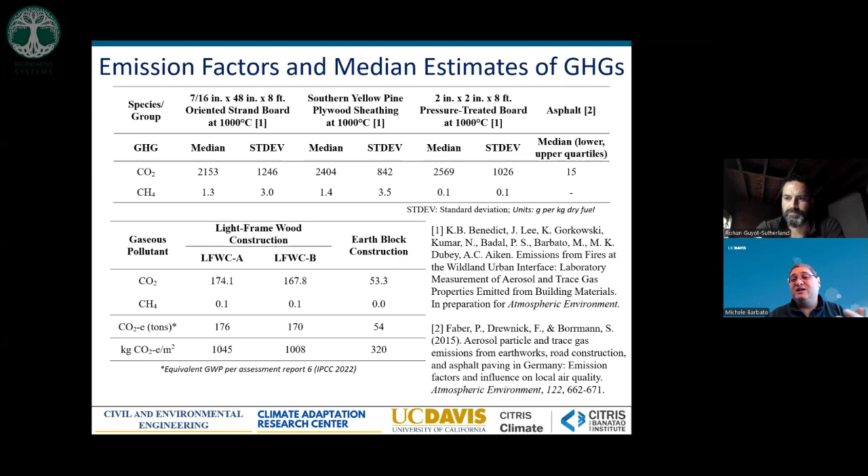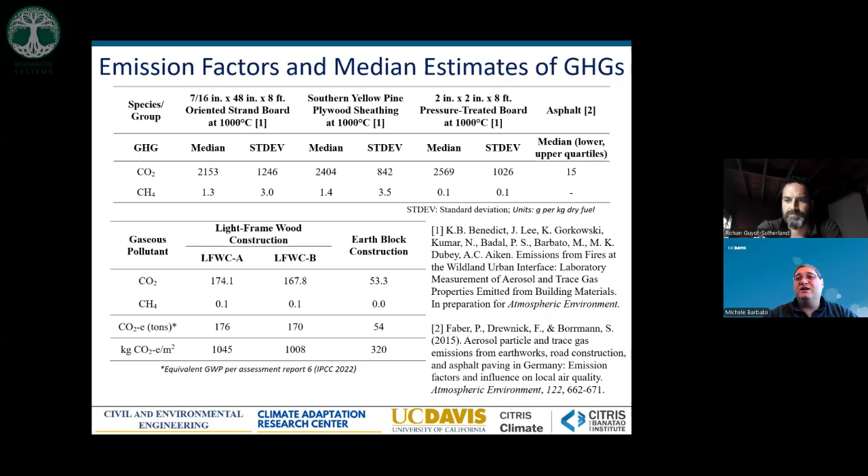So to summarize, we calculated how much emissions in terms of equivalent greenhouse gases come out, assuming the house burns completely. You can see that per unit area, the emissions coming from the earth block construction are about a third of the total emissions from the light frame wooden construction, which is quite obvious because in light frame wooden constructions everything burns, while in earth block constructions almost everything comes from the content of the building and not from the structure itself.

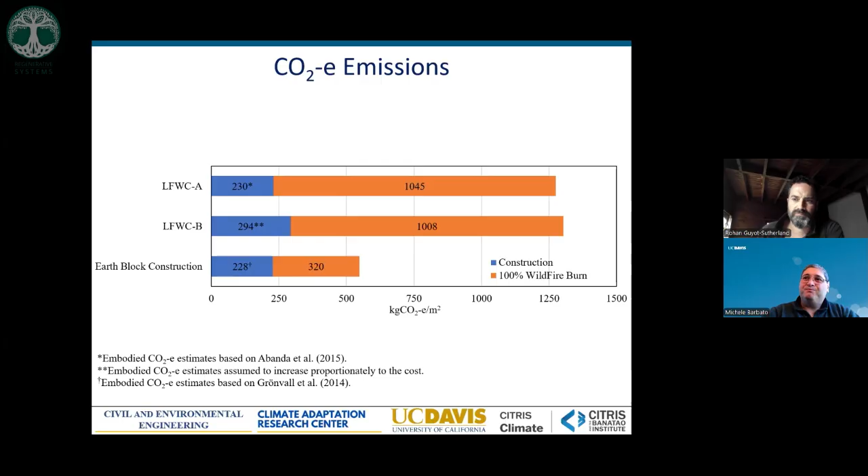To give it graphically, we took from the literature the estimates in terms of embodied energy from the original construction. You can see that earth block construction is very similar to wooden construction in terms of initial embodied energy, which is already a big advantage compared with concrete or brick homes, which have an order of magnitude higher embodied energy. But when you compare total emissions, including the effect of wildfire burn, the earth block construction has significantly lower total emissions than the wooden construction—about a third of it.

This has a huge impact on air quality and global warming coming from the burning of built environment in the construction of homes. So it's something that should definitely be accounted for when deciding what materials to use in construction.

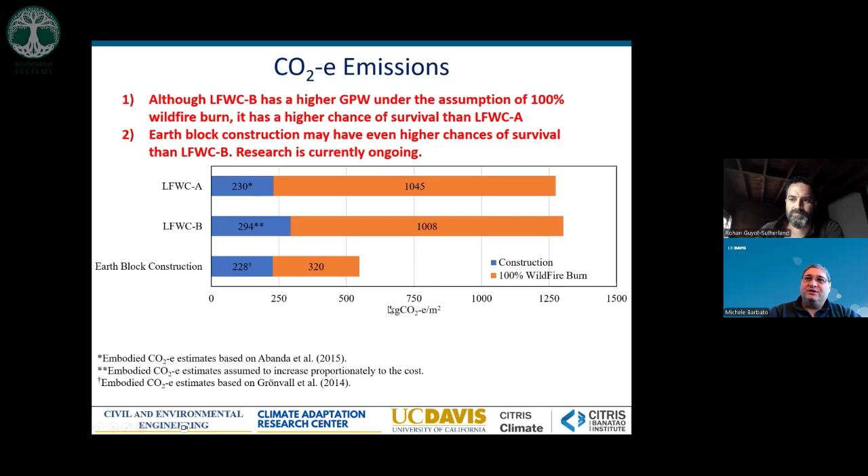Another investigation we did to understand our sustainability was the use of recycled soil for compressed and stabilized earth blocks. The idea is to have the complete life cycle from cradle to grave, and we don't want a lot of blocks just put into a landfill after construction. So can we reuse this material? There are two different ways of doing it: one is putting it back into nature, which we are investigating, and then using it for making pristine blocks using the same soil without having to extract additional soil.

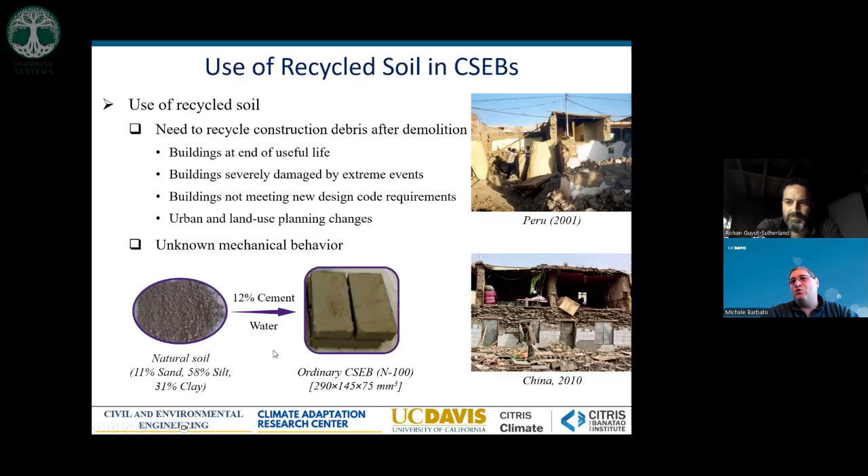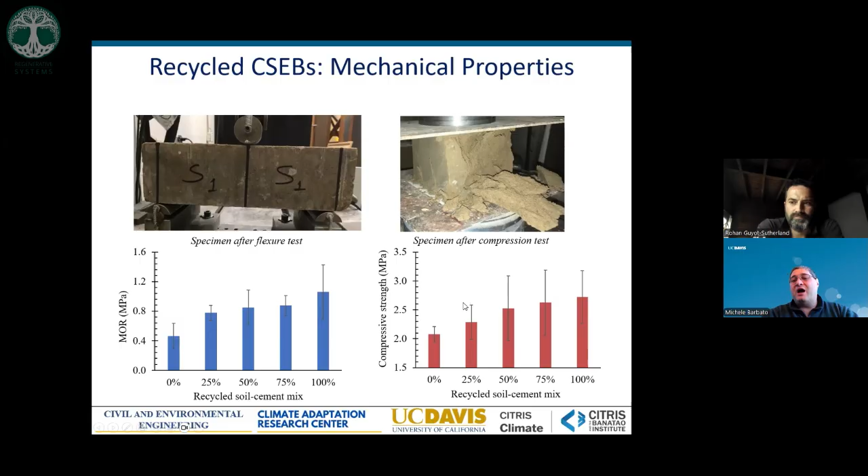The comparison was done in terms of flexural strength and compressive strength. What you get is a strength that increases when you use more recycled soil. The 0% corresponds to the original blocks done with only natural soil. Then 25, 50, 75, 100% is the amount of recycled soil used to produce new blocks. You can see an increase both in the modulus of rupture and in the dry compressive strength with the increase of recycled soil in the mix.

We also did our durability test, and here we were pleasantly surprised to find that usage of recycled soil has no statistically significant effect on durability. We have a loss in mass that is overall smaller than 2% at all of the different levels of recycled soil. Fundamentally, the outcome of this research is that for construction purposes, you can reuse 100% of the material. It's 100% recyclable, which is a nice thing to have.

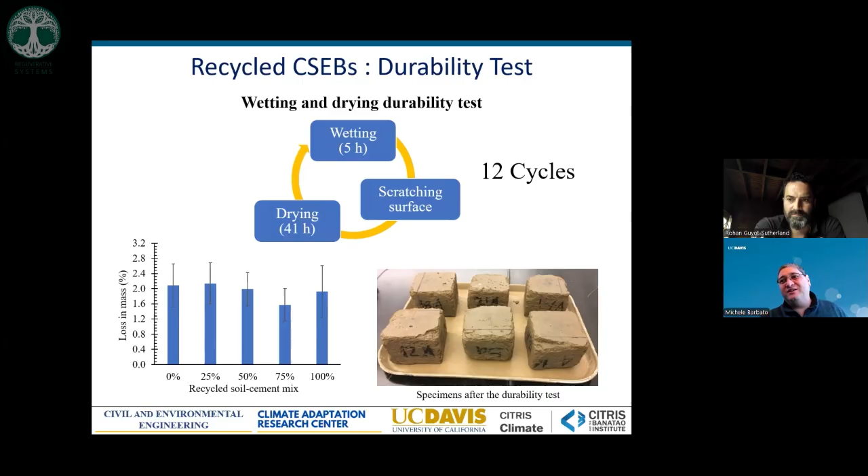I think I'm getting close to the end of my time, so I just wanted to go over a few nuggets from research that is ongoing.

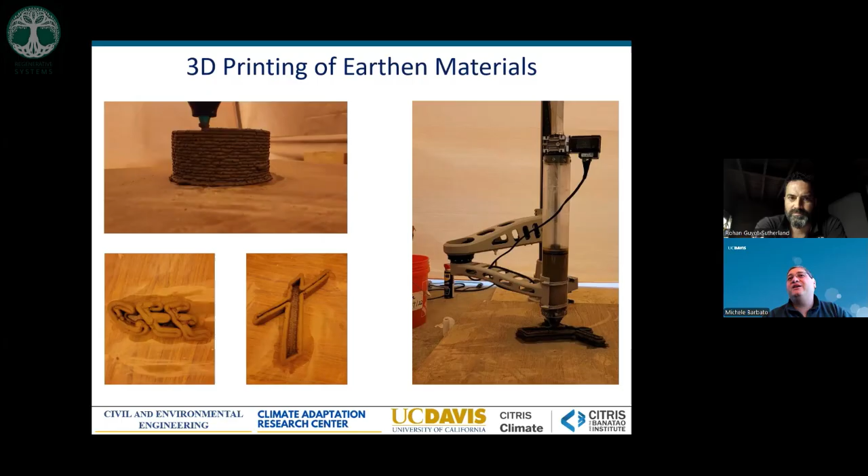One interesting research area is the use of earthen material for 3D printing. This is actually our first successful printout that you see in this video. But now with the same machine and a different auger, we are able to print walls that are 6 feet by 6 feet in dimension, so 6 feet wide, 6 feet high. The material is fundamentally similar to what we use for the blocks, with a little less gravel in order to have an easier flow. We are at the point where 3D printing of earthen material is a feasible technique with a lot of potential applications for the future.

Another investigation, which also contributed a lot to funding all of the research, was on wildfire-induced air pollution and techniques for its mitigation. I'm not going to go into the details of the entire framework, but fundamentally in this research we went from being able to model and forecast wildfires, both at the small scale of building-to-building and tree-to-tree propagation, to a large scale with statistical models for assessing risk at the regional or state level, evaluating the emissions coming from both vegetation and urban or suburban fuel, as well as the effect on air quality and on health of both individuals and population.

All of this information was fed into the different mitigation strategies we considered, including management of vegetation, prescribed burns, land use policies, and fireproof or fire-resilient construction. This information was then fed back into our wildfire modeling to see and quantify what the mitigation strategies can do in terms of reducing the negative effect on health of both individuals and population.

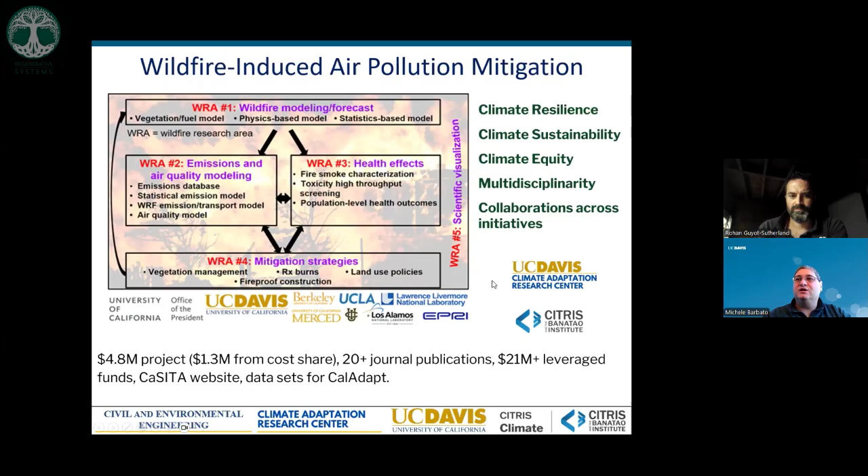Another ongoing project is the development of a facility for testing entire structures under wildfire conditions. The idea is to put a structure here, and we have just built our first specimen, which is an earth block shed of 6 by 9 feet in dimension, which hopefully we will be able to test between this month and next month.

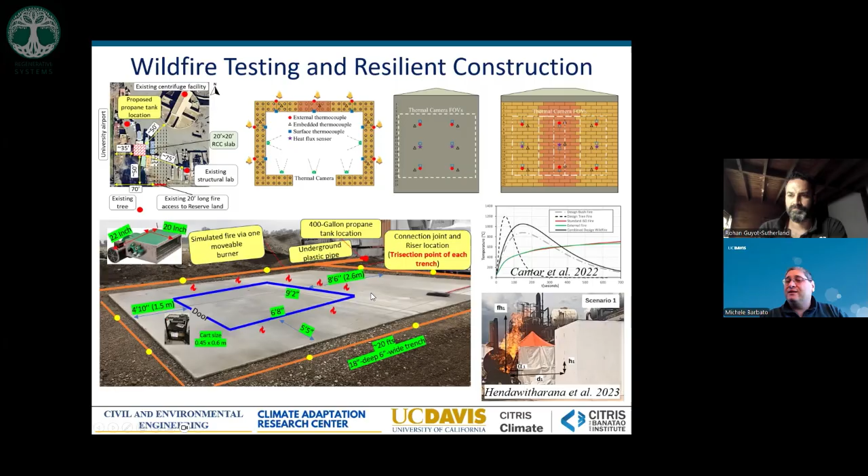And then put flames on at least 3 sides that are directly impinging on the structure in order to evaluate what is happening at the intersection of different components. Chapter 7A and the current standards used for construction typically take a component or assembly approach at a time. So you test a wall, you test a window, you test a door, you test a piece of roof, but it's not really giving a lot of indications and guidance on what to do at the connection of different components. Only a test that actually includes the entire structure can holistically assess if what we are doing is fine or not. This facility that we are building will be the first public facility to do that type of test. With that, I have just a few conclusions.

The first conclusion is that earthen masonry represents a technique that is at the same time affordable, safe, and sustainable, and can be really used for construction of houses and low-rise buildings. These houses, low-rise buildings, typically 1 or 2 stories, can be designed to properly perform under different types of loadings: seismic loadings, hurricane loadings, tornado actions, and we will see wildfire.

We have developed this finite element detailed micro modeling approach, which has been proved to be accurate in predicting the mechanical behavior of earthen construction. We have used natural fibers to improve the ductility of compressed and stabilized earth blocks. We have seen that compressed and stabilized earth blocks can be used as a fire-resilient construction material. I think I forgot to add that the material can also be recycled 100% for usage in new constructions. Overall, earthen masonry shows great potential to address two big problems we are trying to tackle: one is climate change, and the other is equitable economic development.

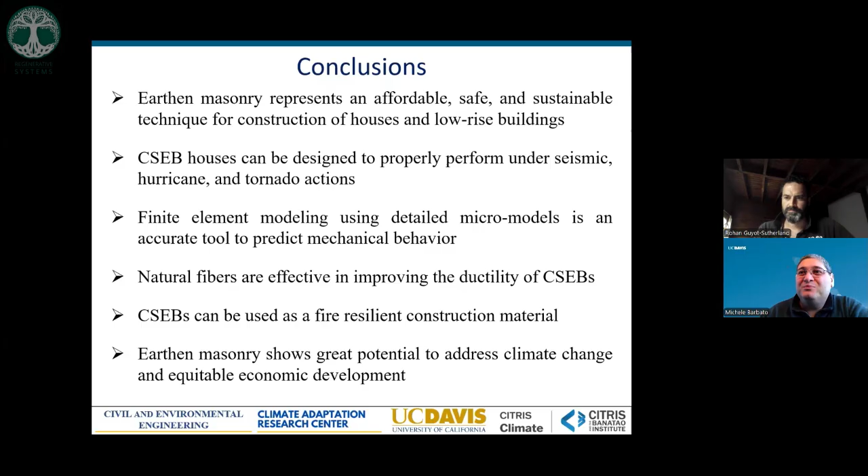I always have to conclude with acknowledgments, and there are two different types here. The economic acknowledgments: without funding, research doesn't happen. This was funded by UCOP Lab Fees Program, EPRI the Electric Power Research Institute, National Science Foundation, the Louisiana Board of Regents Economic Development Assistance, the LSU Coastal Sustainability Studio, and the Jeff Cook Charitable Trust.

Thank you very much for your attention, and I'll be happy to respond to any question you may have. I know this is being recorded, so I put my contact information there if you want to reach out directly to me. The best way of reaching me is my email, mbarbato@ucdavis.edu. If you are curious and want to know more about other aspects of my work, there is also a link to my research lab, where you can see all of the work on earthen construction, plus my work on assessing hazard effects due to climate change and other risks associated with a changing climate. Thank you very much.